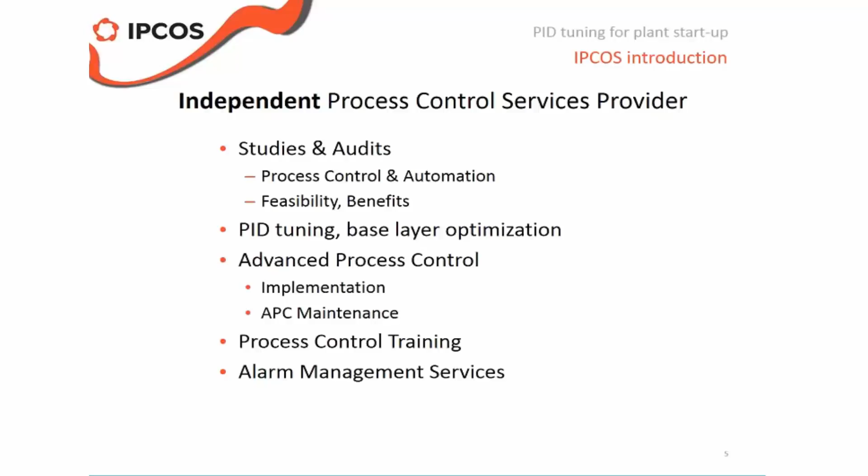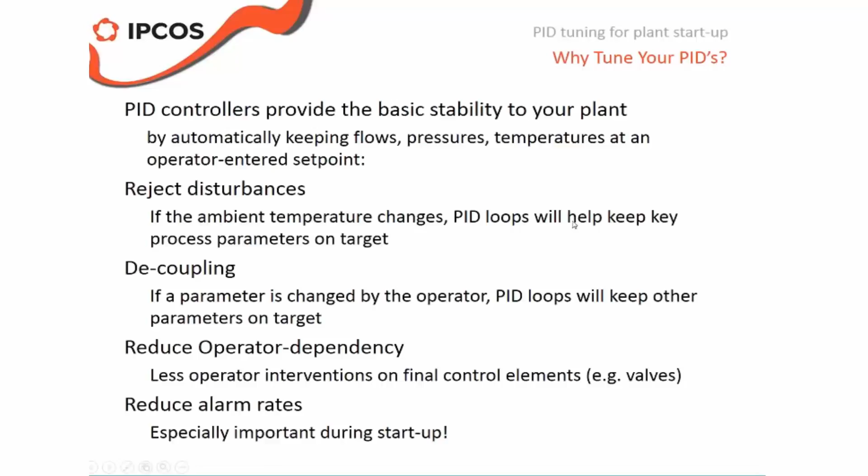So if we take a global look at the phases of plant commissioning, you can say you have the mechanical completion and integrity checking. Then usually you go to something like pre-commissioning and operational testing. And this is all before the plant is actually running. And then we come to startup and initial operation. This is actually where the controllers will become active for the first time.

So this is an interesting period for the plant. You have to push the plant from, let's say, initial operation to a level that is sufficient to stand the performance and acceptance testing. After that, you will probably go to a post-commissioning phase, where you will bring the plant to normal operation. There will certainly be some outstanding punch items, and you'll probably have an extra focus on operational data and consistency of your plant.

Yeah, so we know that this period of initial startup is a very stressful time. There will be a lot of people working around the clock to prepare for that initial startup. And during that period, of course, there are a lot of challenges to tackle that were not foreseen. Things you can encounter in general are mechanical problems, you can have safety issues. We see a lot of instrumentation problems. You also have to deal with material demands, energy demands, and changes in raw materials, maybe disturbances coming from the outside world.

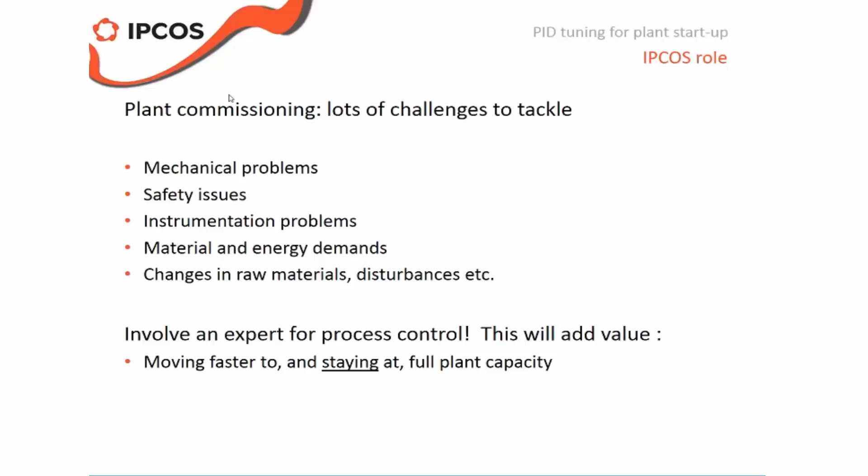Although it might seem that it's more stress to have another company running around the plant at that moment, the reality is that we will make life easier for the DCS engineers, the process operators, and the process control engineers. Because every loop we tune and every variable we improve will add to the total stability of the plant and will improve operations immediately.

So in the post-commissioning phase, you would have another set of jobs you can do. You have achieved that your plant is running, you have done your performance trials and passed your acceptance test, but still there will be the possibility to optimize your plant, to make more adjustments, really look in detail at what we can do to keep you running as efficiently as possible with the best quality.

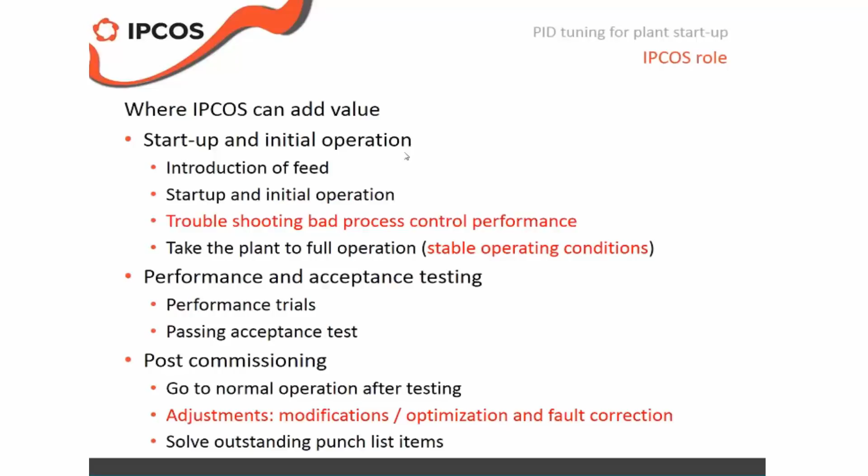So this is one typical situation, DCS default tuning. Another common problem is blaming tuning for hardware problems. So you really need to identify: is this PID loop misbehaving, or are these hardware problems, or are there disturbance sources? Or a disturbance source is another loop, an interacting loop. These are typical problems we see.

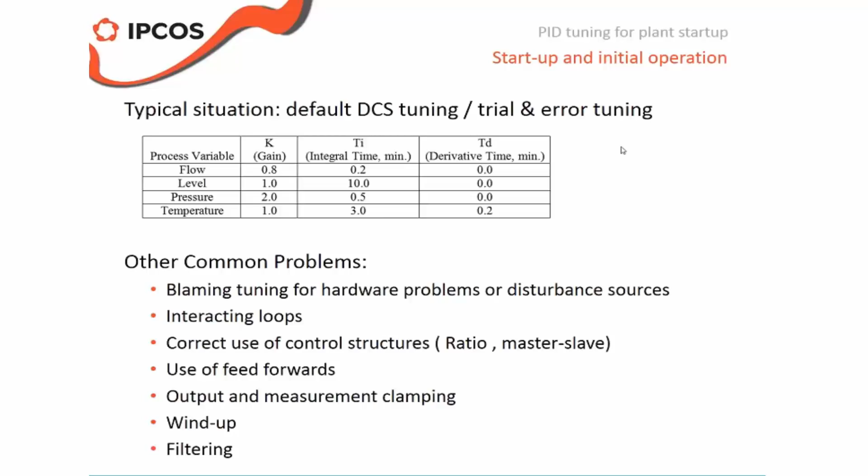Furthermore, you have the correct use of control structures: ratio controllers, master-slave loops, where to use them, where not to use them, the use of feedforwards. Sometimes they are implemented incorrectly, or they are tuned incorrectly. And then you have more measurement type of things and settings like windup and filtering. Is that used? How is that used? And is it used properly? Sorry, I'm getting ahead of myself.

So if we get involved in plant startup, what is the typical work we do? First we start off with the preparation. Before we get to a plant, we investigate the process. Every plant is different, we know this, and this is very important. So we get familiar with the process and the plant, and we already identify items that could pose a challenge during startup and also during normal operations. And believe me, from experience, we know where to look for trouble.

Based on what we identify, we make a tuning plan. So we're not tuning in the way that you just focus on the loops that have a problem. No, you have a structured plan where you go from the front to the back through your plant, and you make sure that you really focus on the most important loops and keep that plant stable. Having a structured plan is very important. So this is what we do before we come on site.

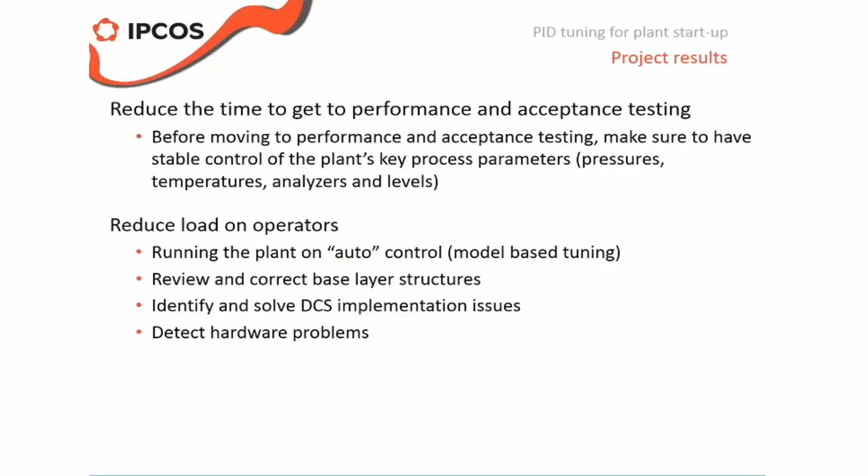Of course, what also helps is if you have the correct base layer control structures in place, and well, as mentioned before, you have implementation and hardware problems, and all these together will make a very busy day for an operator, and everything you can do to reduce that will help out and move you faster to your acceptance test.

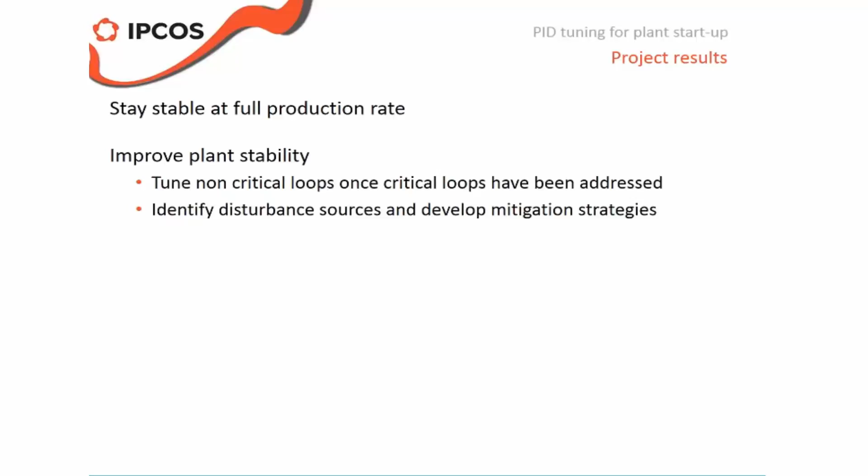So I think based on what we've talked about so far, there's a lot of benefit for the end user. If you can achieve stable plant operation much faster, there's a real benefit in terms of time, and you'll have a more reliable plant. And if you have more PID loops in auto, you have a better tuned plant, and you can also achieve a faster startup, which is not only important for this startup phase, but also for the entire plant life.

So another question you may ask: what's in it for the EPC? We know that EPCs typically don't want another third party involved in the performance testing and acceptance testing and moving towards that. The EPC often fears that the third party might make life more difficult, but in reality it's the other way around. We'll make the life of the EPC easier and help him identify problems and tune the base layer, so as to achieve guarantees much faster.

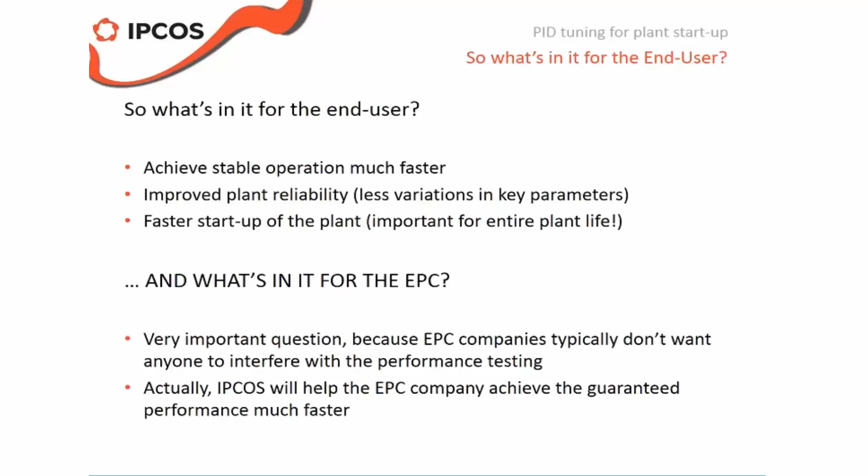So just some examples of the work we have been doing. I've picked just two customers, just to give you an idea of the things we saw there. The first is actually a vinyl plant in Russia, and we were present during the initial startup phase. As you see, we were involved in tuning a lot of kinds of PID loops: level loops, pressure loops, pH loops, temperatures and flows, so more or less most of them. And these were located in different sections such as wastewater treatment, some reactors, purification and chlorination.

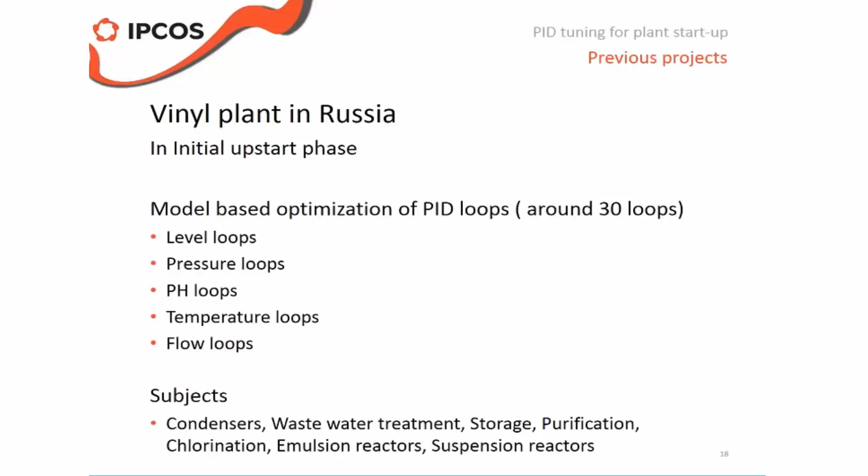This was actually looking at the plant as a whole. Now if you look at the common problems that we saw there, there's actually one I haven't mentioned before, and that is switching sequences. So these were polymer reactors. So we changed their PID structures, we changed some master-slave controllers, introduced some ratio controllers.

Changing of PID equations is sometimes really important. What do you want to achieve? Do you want set point tracking? Do you want disturbance rejection? So that is something you need to look at, and especially in the case where you have a recipe, you really need to focus on that. Also, when you have changes, so smooth switching sequences, we looked a lot at set point and output tracking logic.

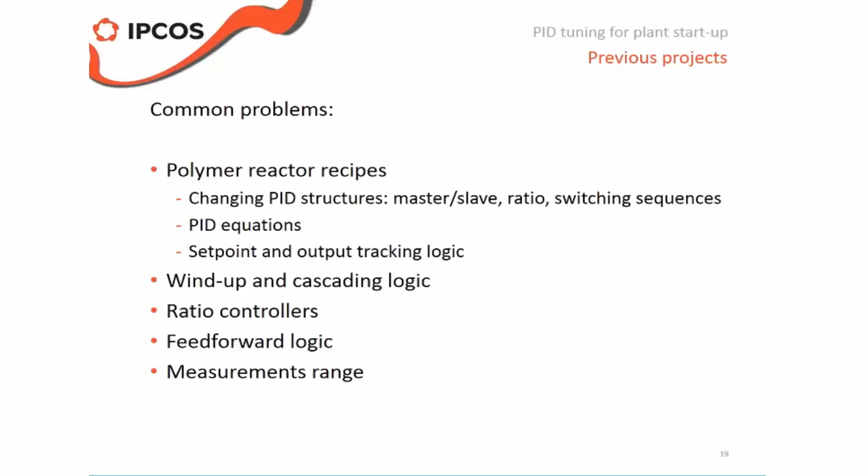And here I mentioned another couple of common problems I already mentioned before, just to post them to you. Now, if we do a project, for the more difficult loops we'll use our model-based tuning tool, which is called aptTune, and we start off with stepping open loop, and we'll make a model. And what you see here in the plot to the left is actually the model of the excess ethylene content.

Now, if you look at the red line in the other plot, that would be how a step response would be given the default tuning. And you see it's quite oscillatory. It takes a long time to reach set point in this case. So just to illustrate how bad it can be if you have default PID parameters in place. And of course the blue line is what we ended up with after using this modeling tool. So again, this is just to illustrate the need of looking at those things.

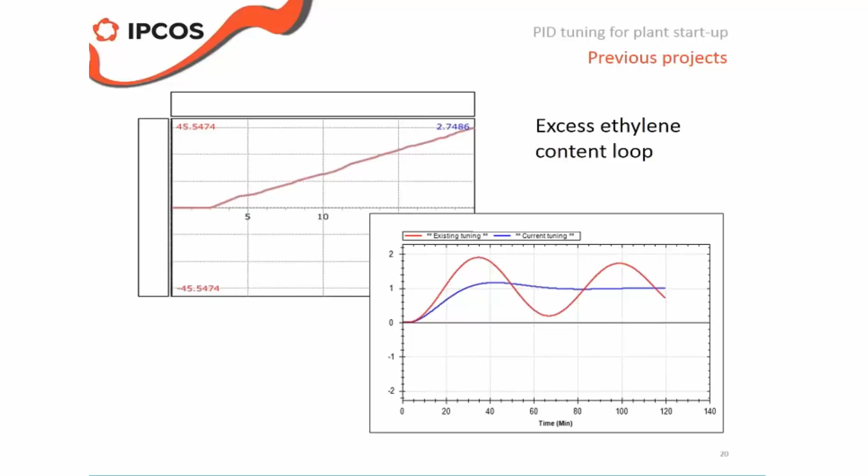Another project we had is batch reactors in Belgium. We were actually involved also in the initial startup phase, working side by side with the EPC in this case. And the main loops that were looked at there were temperature loops, very slow temperature loops, and pressure loops. And again, the most common problems encountered were the structures of PID and the reactor recipes, so how you move from one to the other. And in this case, there were a lot of recipes on one reactor.

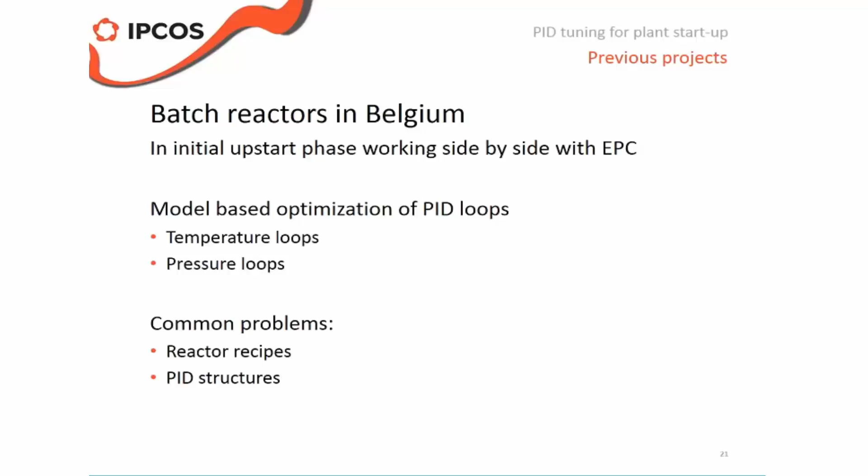So what we came up with was a set of benchmark rules, benchmark recipes, and we tuned all the reactors using these benchmark recipes. And that worked very well. It took some time to get the right benchmark, but after we tuned the benchmark recipes, the customer would do its own performance and validation tests after us. And what we found is that if you think about the right benchmarks, you can really tune those, and we passed all the performance and acceptance testing later on. Of course, there were a few special reactors where we had to do another round, but in most cases this worked very well.

So just two examples, very short, in an overview way, of what we did at some customers' sites.